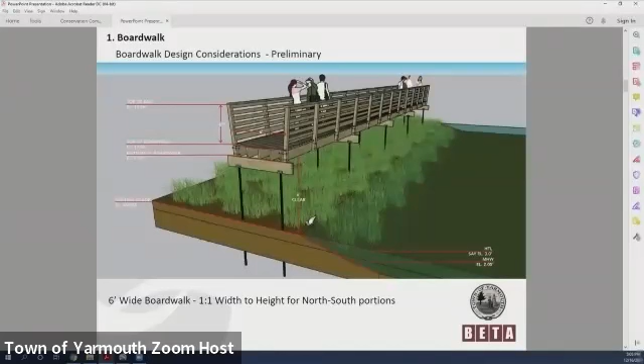You look like you have a question. Yeah, does anybody know the width of the Grays Beach boardwalk? Yes.

I went out and took a look at that, and it's 4 feet wide there inboard of the posts. And we're currently proposing to be at 6. Oh, well, for this, that makes me feel a little more comfortable.

Do you have a separation that you're proposing between the boards on the walk? In terms of the space? Yeah, ADA requires a half inch or less, American with Disabilities Act, so it's going to be in that range. At this point in time, we're thinking it's all boardwalk and not grading. I know at one point we talked about grading might be an option, and we feel like we can be successful with planks, and it's a more consistent system.

Thank you very much. So then while we're talking about that, I think, because we typically will ask applicants with dock and pier projects to go with the now standard recommendations of marine fisheries, where we have a 1.5 to 1 ratio, I would suggest that would be the better way to go. I realize it's going to be a longer, taller thing, but I think if we're asking everybody in the public to do it, we should certainly expect the same thing from any town project as well. So that would be my comment on that.

Yeah, I wonder if I could go back a slide and look at the plan view, and I'll just touch on the approach. So particularly in the north-south runs, the yellow runs, we were hoping that we could maintain the minimum of a 1-to-1 ratio there. So I understand what you're saying.

You're asking for greater height. We thought because of the solar orientation that there would be good access to the marsh grass canopy and sunlight coming through in those yellow sections.

And they were proposing to transition to a higher elevation for the red section. So there we were looking at a 1 to 1.25 ratio, essentially gaining some elevation over the marsh for the red section. And as Laura said, that's also the area that would have overlooks, so the overlooks would be a little bit wider because there'd be room for people to stand and other people to pass by. I think we do have a slide later that shows the idea of how to transition from one height to the other.

I think the other point I try to make is the terrain of the marsh does vary subtly within like a 1 foot range. So while it's all tidal, our goal would be to establish even elevations for the boardwalk, not a lot of up and down. So in some areas you would have greater height separation because the terrain would drop down and we'd be maintaining a constant height. In the process of developing the permitting work, we're going to be looking at that more closely, looking at exactly the topography underneath the alignment.

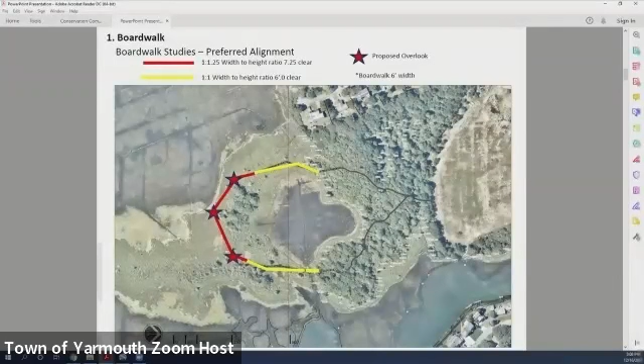But I did want to just highlight this, that we were proposing 2 different heights under this current alignment. And I will also add, as Eric was saying, the boardwalk might be greater than 1-to-1, but we're basing our height on the tallest point of where the boardwalk would be above. So at no point would it be less than that 1-to-1.

So I know you went out to Gray's Beach to confirm the width of the boardwalk as well as the spacing. Did you confirm the height of the boardwalk as well when you were there? It's a good question. I estimated it at about 4 feet. It varies because there's a little bit of a tidal inlet. The reason I paused is one of the last times I was there, it was damaged after the nor'easter, and so I couldn't get to where I wanted to go. But we wanted to look at that more closely. It's about 4 feet above the marsh.

Thank you. And what's the flood elevation here? Anybody know? BFE's 12, I believe. 13? I think it varies. So closer to the water, I think it's 13, and then it moves to 12 closer inland.

So, I mean, that's my other concern with this. The light and shading aspect is one aspect that I'm asking this about. But the other reason is because if we have flood elevation at 13 and you're only doing 6 feet above, that's going to give plenty of opportunities where that boardwalk is going to be more prone to more inundation. And if that's the case, are you going to be coming back more frequently to fix something or raise something? I'd rather just see it done once the first time instead of coming back and saying, okay, well, we're coming back to fix it again and again and again. That's just, again, my opinion.

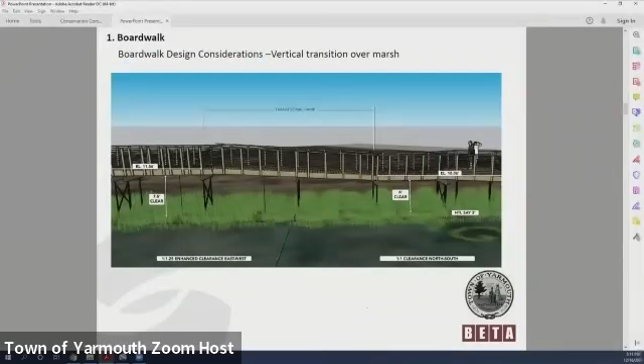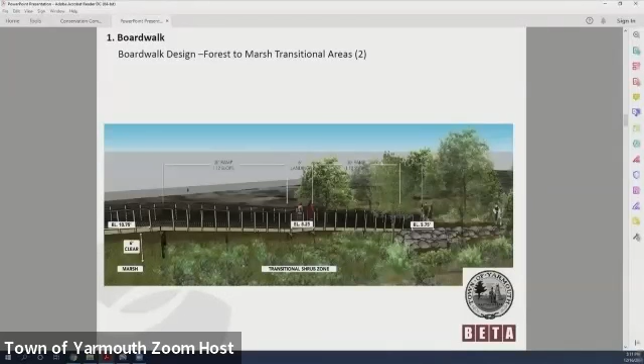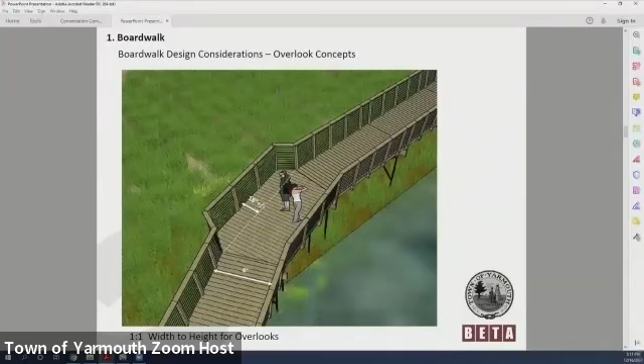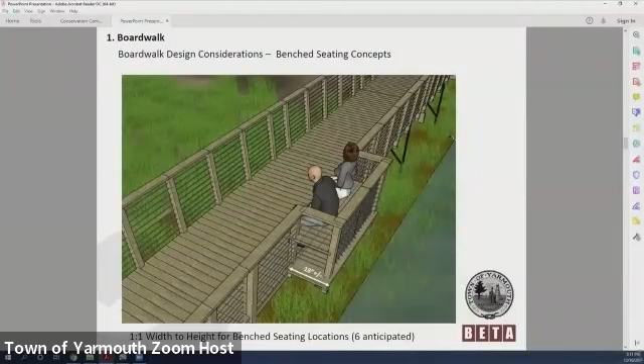There's also a consideration to add some bench seating. It hasn't been fully designed yet, but we're saying up to 6 are anticipated. We're still working through some of the design elements on the benches, which would occur along the straight shots of the boardwalk.

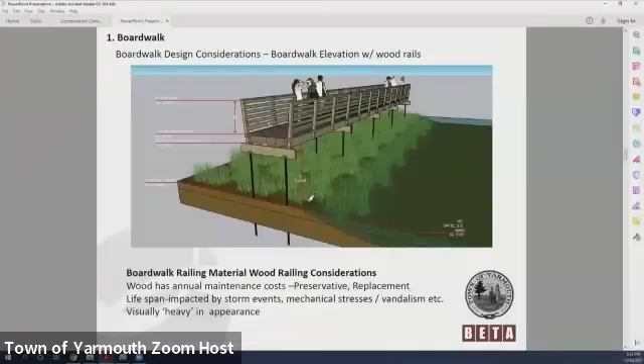So we have also looked at a couple of materials for the railings. One would be to use wooden railings, and then another would be to use a cable railing system.

In our presentation that I believe you've read, we went through it—we're looking for a little bit of flexibility here. We don't exactly know what's going to be available when this goes into construction and what construction costs are going to be. So leaving some flexibility in exactly what type of material we'd be using is what we're looking for. But we've analyzed the pros and cons of each.

We had a committee meeting last week, and the committee's interested in maintaining as much flexibility as possible. Some of the systems will cast less shadow, like the cable system or a mesh system. But the plank sort of style, like Gray's Beach, is something they're more familiar with, and it's possibly easier to maintain. Going forward, it may be a combination of different railing types, and we'll get to the solution we need to use here. But this is a slide that just says because of lots of reasons, we need to stay flexible on the design process for the rail.

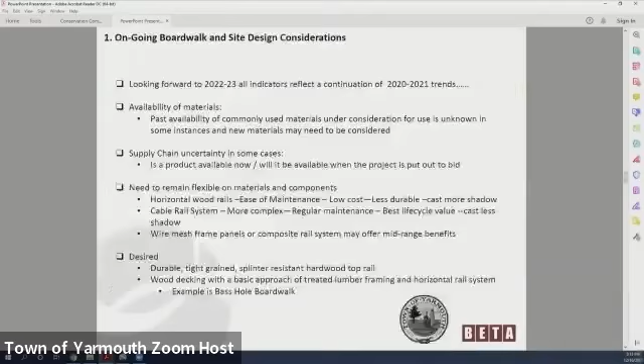That's our last slide on the boardwalk discussion. I don't know if anyone else has any input on the boardwalk height to width ratio. We are proposing extensive mitigation—we will be including mitigation in the Riverwalk Park for the impacts to this associated with the project. So just wondering if anyone else wants to weigh in.

Yes, I have a question. Why 6 feet? If Gray's Beach is 4, why are you going with 6 feet wide on this one? Is that ADA? Is that a need to be ADA compliant, or is it just 6 feet for some other reason?

Yeah, sure, that's a good question. A couple things factored into the discussion. It's been in the plans from the committee for 3 or 4 years now that that width was the goal. Part of the goal is ADA really only requires 3 feet for passage, but it does require areas to turn wheelchairs around on a regular basis. Creating those adds a little bit of complication to keep repeating these turning areas, so in some ways it's easier to just pick a width and maintain a constant width.

6 feet allows a little more free passage in both directions. I think the pandemic also showed a little space is good. There are some challenges at Gray's with people actually having to touch each other when you pass. And this boardwalk is long—about 1,600 feet in its total loop. So there's not really a clear one-way option, maybe it could be a one-way system, but it's hard to enforce that, so it's probable you're going to encounter people in both directions.

So there are concerns about longevity, and in concurrence with this system, we're also looking at a conventional wood piling system, which you're more familiar with, like Bass Hole. That's what you have. I think with this particular system, it's lighter weight equipment, less of a footprint in the marsh, so sort of less of a permanent impact. But that's got to be balanced with durability, as you say, and long-term ability for the structure to stay there.

We've had a number of installations over the last 2 years utilizing composite pilings, and certainly a lot of benefits there potentially for this project - lighter, easier installation. Just didn't know if it was part of your analysis or not. That would be something I'd like to maybe talk with you more about, composites.

We've looked at a hybrid that is a screwed-in helical anchor and then a wood post, but I don't know that we've gone to the next level in terms of a Pearson composite. Pilings from Rhode Island has been utilized a number of times on Bass River. And relative to the grating, at this point, we're trying to stay with just a standard system, which is the plank system. Were those private docks or public docks you're speaking of? Private.

Yeah, so one of the challenges here is the ADA compliance requires a very small opening in the decking. And the amount of light that would get through that can be challenging, especially when the grate is so thick that not much light can get through. At least that's what we're finding at this point in our investigation. So we're still looking at the plank system, but I'd love to talk to you about those.

Anybody else? Yeah, thank you. I like your planning, I like what it looks like. I know you'll make some adjustments as have possibly been suggested, but I appreciate your effort and the effort of the committee. I think it looks great. Thank you.

So here we're going to talk about Riverfront, degraded versus non-degraded, and how we're going to apply the definitions and the regulations. This is an aerial photograph taken from 2021. It shows the locations of the revegetation along the banks of the river, and it also depicts the larger drive-in area, as you can see where that was located.

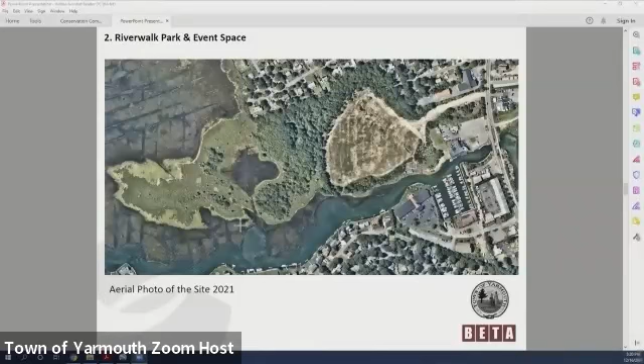Sorry, I might have just messed you up. Not working anymore. Yeah, give it a try. All right, let's see. There we go.

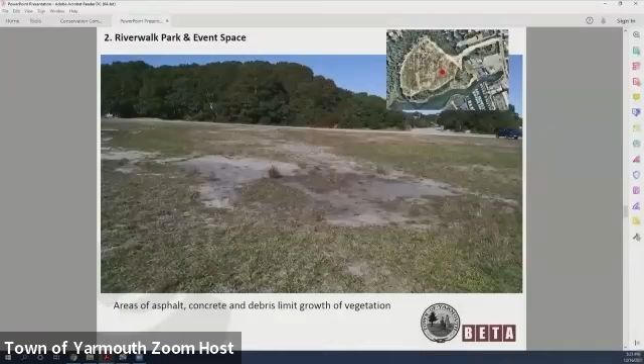I'm going to go through our analysis of the site. This is a picture of what the interior of the site looks like. The former drive-in area shows limited vegetation. The soil is extremely compact, with debris, concrete and asphalt scattered throughout, with small amounts of sand on top and some herbaceous vegetation growing in that sand.

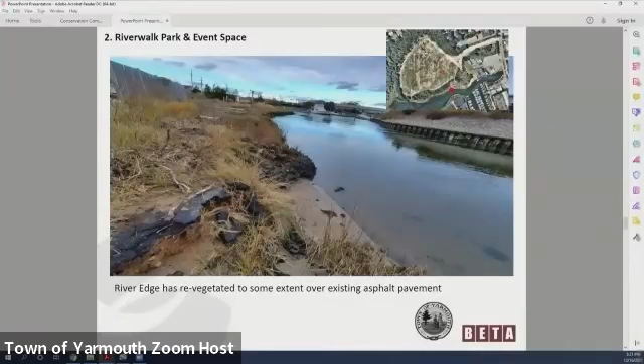This is a picture of the bank of the river, which shows asphalt that extends up to the river. Given the extensive salt marsh vegetation on top, we're not considering this area degraded, but the area associated with the upweller, we are, and we'll talk about that in a minute.

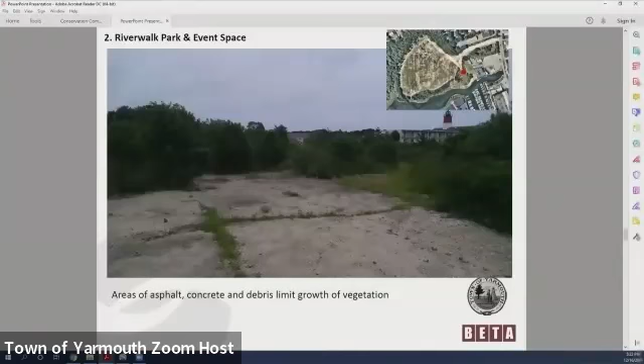This is an area shown with the red dot in the upper right corner indicating where this is. There are areas of asphalt and concrete again along the project within the riverfront area.

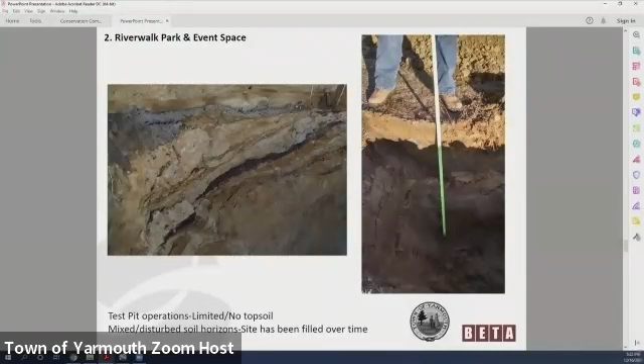Finally, this is a typical soil profile from our test pits, looking at what we can do for drainage and other considerations. We found lots of mixing of soil types, and little to no topsoil present on the site.

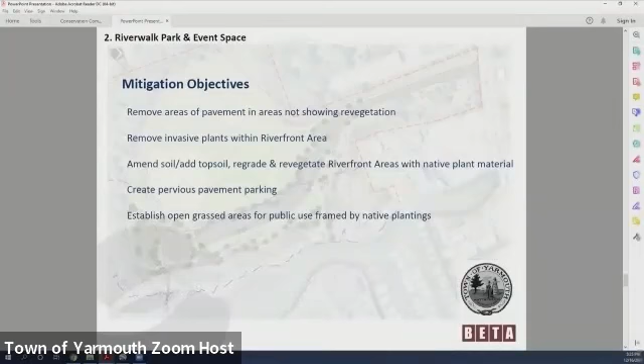If I may, I have one question for you. This kayak launch area - are you proposing that they walk the kayaks all the way down that ramp, or will there be storage on the resource area for these? Because that looks like an awfully long ramp to be carrying a kayak down, or a plank, and then down the ramp and then off a float.

I don't know how that would be feasible unless you're keeping the kayaks in the resource area. If it's going to be done, I've done it - it can be done, it's just not very easily doable.

I think it's fair to say we're still looking at how that works. Ideally we're using the same system as the boardwalk, so it's going to look the same - the wider, 6 foot width. So there's a little bit more accommodation going out on the pier itself, but there are those challenges you talk about because of the distance.

Ideally there's some type of rack system up where the cul-de-sac is, right around the 100 foot line. There'd probably be support racks, maybe a small kiosk at the cul-de-sac drop-off area, and that would be where storage would work best. Then they'd have to take the kayak 100 feet out on the board.

Yeah, and the challenges of the ramp itself - I've ridden a kayak down a ramp, it's not real fun.

So it is a piece we're still continuing to look at. It's been in the plan since 2017, so it's one of those things we're now getting back into, and we need the bathymetry to really finalize the position. That will affect the gangway and some of those things, and hopefully decrease the navigational component too, because it's very narrow in that area - that needs to be assessed as well once we get it dropped in.

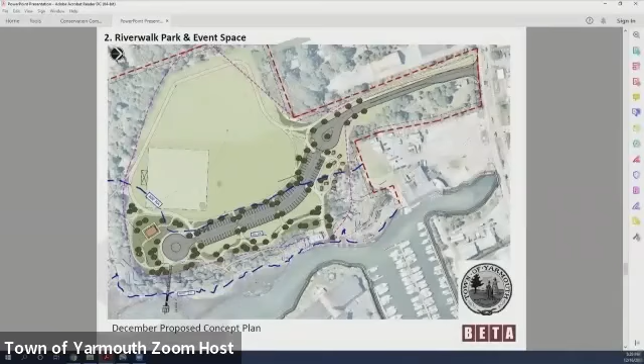Yeah, that'd be great. Along those lines, how many parking spaces do you have in your plans there? There's I think between 90 and 100. We've played around with the configuration a little bit, and those are permanent spaces along that entrance drive coming in.

And you can see there's a group we're calling artist shanties up there in the northeast corner. So there's probably that first group of parking associated with that use, maybe some of that second - the middle is probably associated with more passive recreation. Then the last group to the south is probably associated with the water access, the kayak and canoe and maybe paddleboard, and certainly people headed out to the boardwalk.

Part of the goal here is also to have sort of a perimeter walking system for the field in the inland areas, so that you can make a loop and then go out to the boardwalks and come back into the park itself.

Looks good, thank you. Great. Maybe I missed it - what's the majority of the rest of the field going to be?

It's flexible, it's going to be grassed. We've been working a little bit with fire and safety in terms of their access requirements. There's kind of a lightly shaded section to the west, and the thought is that would be where the parking would be on site, like overflow parking for an event - really in that upland area that's lighter shaded beyond the event space.

On to bathrooms. All right, on to bathrooms. Sorry, Mr. Chairman, can I just make a comment?

One of the things that came up during the design meetings was trying to have a pathway that gave people a view of the water as part of the Riverwalk Park. With the vegetation being relatively high, they wanted to get as close as possible to the river while still respecting the 35-foot setback and the requirements of the riverfront area regulations. So I wanted to bring attention to the idea of putting a pathway closer to the water, and get feedback on the 35-foot setback, the width, and the materials.

I assume it's going to be some sort of hard pack construction. Is that what you're thinking about? We're having some challenges with the water table out there being higher than anticipated, so a hard pack, like a stabilized earth path, might be the solution rather than trying to do a pervious path.

Laura pointed out concerns with sediment, especially in that environment, which might deplete the functionality of a pervious system, so I don't think that's going to work. So as you suggest, a stabilized earth, crusher dust, or something like that might be the treatment.

Okay, anything else? Kelly? Anyone? All right, so restrooms.

The restroom is shown near the cul-de-sac, at the intersection of the three aspects of the park, so it's near the parking and the kayak launch, near the event space, and also near the entrance to the path to the woods out to the boardwalk. It's centrally located, and that's why we're proposing it in this location.

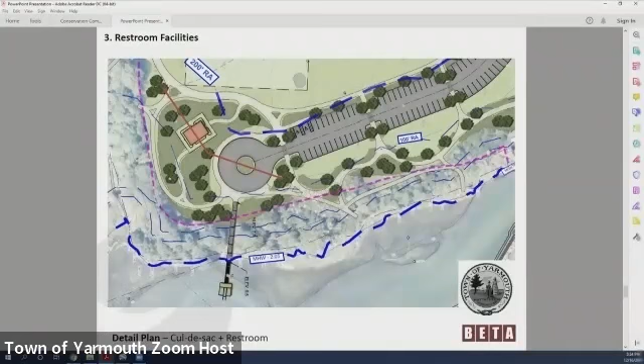It's shown within the outer riverfront area, between the 100 and 200 foot lines. One consideration is that the restroom is within the floodplain, and currently there's no sewer to the site, and because of the high groundwater, septic is also not available. So we're looking at using a temporary tight tank until the sewer is installed. We can answer any questions on that.

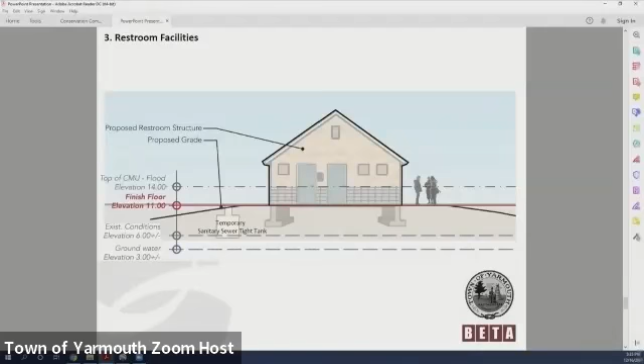There's also grading on the outer area of the restroom to protect it in the floodplain so it won't get flooded during larger rain events. You can see here what we're proposing, the dashed line on the bottom is roughly the existing grade. One reason the restroom is positioned here is it's one of the higher parts of the site, allowing us to elevate it by placing some fill there and getting it a little more out of the floodplain.

As Laura said, it's probably going to be a concrete masonry unit building, where the lower level can be flood proofed with stop logs and weirs to protect it from getting inundated. So that's the concept we're pursuing now. And as this shows, the tight tank would be next to it. In the future, that tank would receive a pump station and would be able to pump out to the sewer service when it comes in on 28.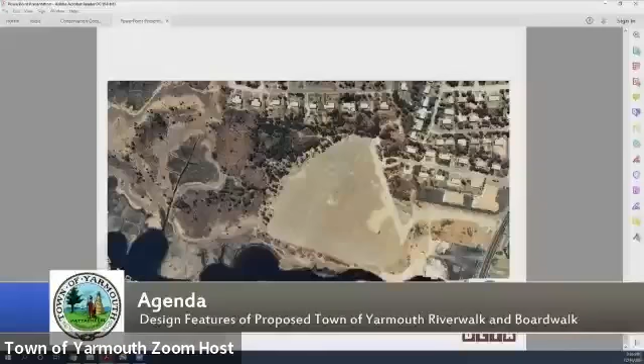All right, next order of business, a request for determination of applicability for John and Catherine McNamara, 7 Kelp Lane, Yarmouth, proposed expansion of an existing 5-foot by 20-foot float within land under the ocean and land containing shellfish.

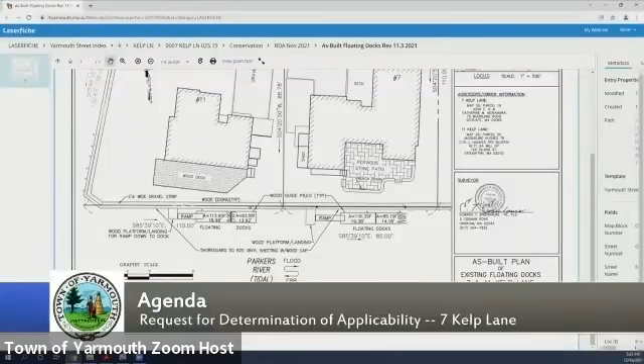Okay, so it's increasing by 100 square foot, right? Basically, yes, just within, just a smidge outside the 200 square foot limit.

Questions from the commission? Start with Ellie. Is this existing now or is it proposed? The floats are existing, yes. It's what was there when I bought the house 7 or 8 years ago.

Okay, does your Chapter 91 license allow those 2 floats? It does not, no. It allows a 5 by 20 float. What's the depth of the water there, do you know? About 4 feet.

I know our regulation is 200 square feet, but that is a very narrow area and it does create a lot of shading. That's really my only concern, that it's very narrow in those little fingers that they have there, so.

Just my thought, that's all I have, thank you. Okay. I was just wondering, you're trying to accommodate your boat on these. We tie the boat up there, correct, and how long's your boat? I have one that's 30 feet, one is 18 feet, so they protrude beyond, actually, 2 boats, okay. I kind of agree with the fact that those floats continue the whole length of that area.

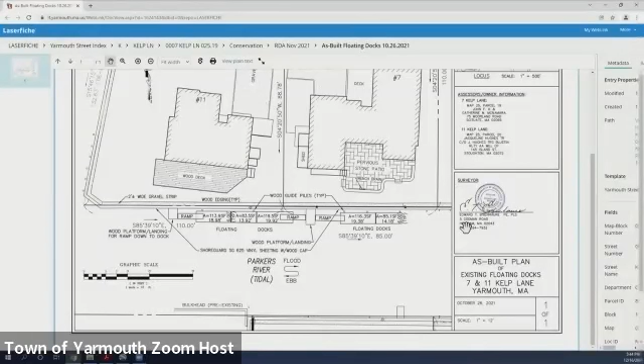So the property to the left, I think it's 11 Kelp Lane, right? Correct, they were permitted for two floats at the 200 square foot, approved by the commission. I'm not sure why, maybe because they're on the Parkers River side so there's more space there. I looked at all the permit sizes for other properties in that stretch, and they were all 6 by 25, 6 by 22, 6 by 24 - one float. And that's all I have.

Okay, I would tend to agree that if it was permitted for 100, it's awfully congested in there, so I would be inclined to keep it at the 100, but Ed, that's just me.

Just another thought - if you look at the other floats in the area, there's one 6 by 25 and the dimensions Kelly mentioned: 150 square feet, 132 square feet, 144 square feet. And then we're asked to make a judgment call on 230 square feet additional - that's disproportionate. I agree.

Okay, anybody else in the commission? Anybody in the audience have any comments or questions on this project?

Can I make one suggestion? Yes, you may. Given that some of the other properties have up to 6 by 25, I don't know whether an in-between size consistent with the other properties would be an appropriate suggestion or alternative. It is. This is an RDA though.

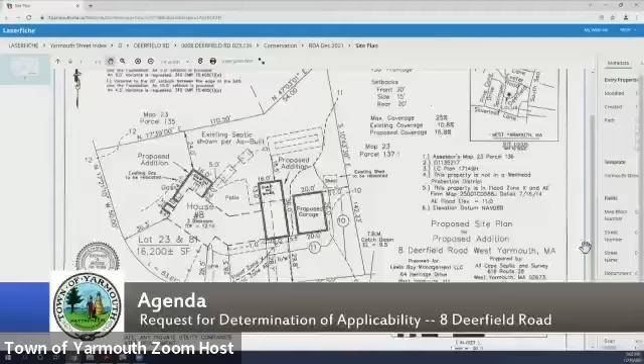There's no wetlands or anything like that. I don't know if you guys went out there, it's a fairly flat lot. From the street to where the structure's going to be, it's probably about a 6-inch grade. We're going to put 2 dry wells in to catch any water runoff from the garage. Okay, very good. That's about it. And we're removing the existing asphalt driveway where the existing garage is, and we're going to remove that and plant grass, and it'll be a stone driveway proposed with cobblestone. Okay, very good, thank you.

Questions from the commission? Rick - all set, thank you. Tom - all set, thanks. Paul - no questions right now, all set. Ellie - good. Kelly - I have nothing. Does anybody in the audience have any questions, concerns, or comments with this proposal?

If not, may I have a motion for a negative-2? So moved. Is there a second? Second, Tom. Thanks, Tom. All those in favor? Aye. Aye. Opposed? Carried unanimously.

Great, thank you. There you go. I bet you were worried, weren't you? He should have been. Hey, that was painful, right?

All right, next order of business is a continued notice of intent, continued from November 4th, 2021, for SE 83-2306, Jeffrey and Beth Fanara, trustees for 116 Mayflower Terrace, Yarmouth, proposed elevated walkway with fixed landing within land containing shellfish, land under salt ponds, land containing salt marshes, and land subject to coastal storm flowage.

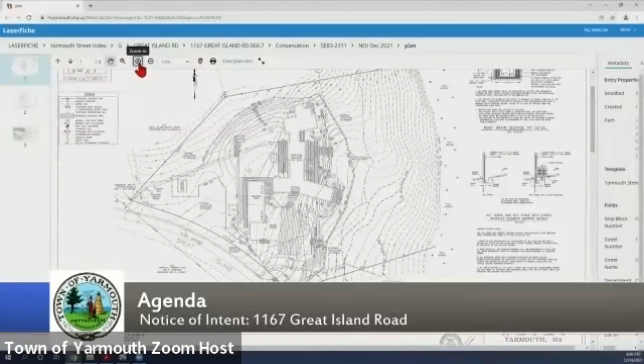So just to refresh everyone's memory, the resource areas here are a salt marsh, then we have land subject to coastal storm flowage moving inland, and we also have the top of a coastal bank associated with the salt marsh. The 100-foot buffer zone to the top of coastal bank extends into the upland on the property.

The project has been designed so that it's completely outside of the 100-foot buffer zone to the salt marsh, and completely outside of land subject to coastal storm flowage. The project is within the 100-foot buffer zone to the top of the coastal bank, which is why we're here tonight. This is a large house on a large property, so there's a lot going on in the upland.

Just a couple notes about the upland: most of the structure and the accessory buildings fall in the upland. The septic system is entirely in the upland outside of the 100-foot buffer. And most of the driveway and parking areas have been designed outside of the 100-foot buffer to the top of coastal bank.

So moving towards the resource areas, I'm going to start with what is inside the buffer zone. First, we have 345 square feet of the structure located inside the buffer zone. The closest the proposed structure is to the top of coastal bank is a distance of 78 feet.

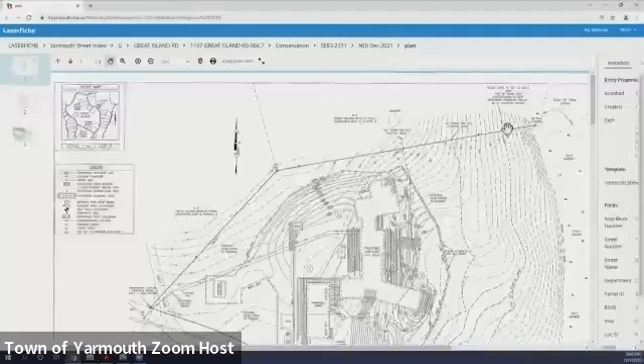We have provided a limit of work and erosion control barrier shown on the plan. This is a hay bale silt fence erosion control barrier. At the closest point to the top of the coastal bank, there's a 55-foot separation between the limit of work and the top of the coastal bank. You can see where it comes to a point where that part of the structure is in the buffer zone, and then the erosion control angles towards the property lines, and the undisturbed buffer gets wider as you move towards the property lines.

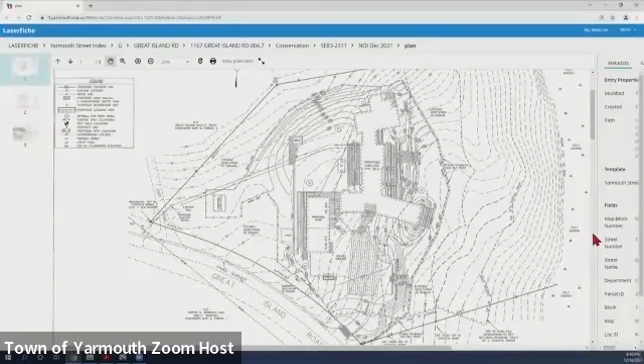So of the 6,500 square feet of disturbance in the buffer zone that I mentioned, upon construction and final grading, 3,800 square feet of that temporary disturbed area will be replanted with native species. It is the plan of the property owners to come back to the commission in a few months. They'd like to develop a plan with Wilkinson Ecological Design Company to develop a robust, diverse buffer zone between where the yard area ends surrounding the house and as it heads in towards the wetlands. So I think that's it, and we're happy to answer any questions the commission might have.

Okay, thank you. If you don't mind, I'll start off with a couple of minor things. On your regular engineering plan by Schofield Brothers, this isn't a big deal, but I would like to see a distance from the closest point of the house construction to the coastal bank. From the limit of work or from the structure? From the structure. Okay, we can add that.

In terms of the trees you're talking about cutting down, I would ask that you don't cut any. The only trees you should be cutting down at this point would be for construction purposes. You're going to be coming back in a relatively short period of time, probably before the project even gets rolling, to develop your view corridors and landscape buffer landscaping. So I'd rather see something that handles those trees, the trees getting cut as part of the view corridor, under that new notice of intent.

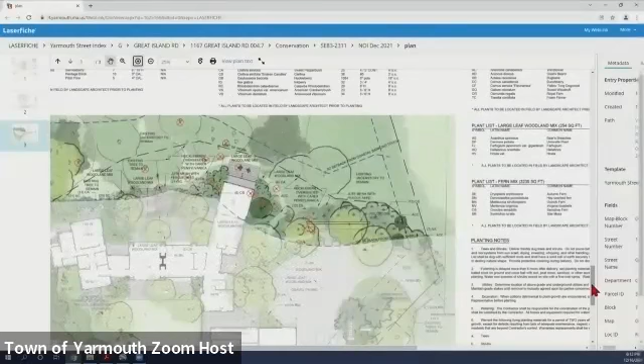The majority of the trees are within the limit of work. Is this the one that works? It looks like that's just 4 trees, inside the 50 or just outside the 50. Yeah, outside the 50. Okay. There are the 5 trees that are outside of the 50-foot buffer and between the limit of work.

We've proposed to remove one pine that has a rotted base, one pine that doesn't have a canopy, and 3 oaks that were being removed to allow more light into the understory and let the adjacent trees mature. With that said, we'll be bringing a project forward with Wilkinson and can address those within that particular package. Yeah, I think you should. The trees that are diseased, I understand that, but again, I would put all of those into your new filing and not include them as part of this file.

Okay, I'm good on that one. Got that one. Let me read my notes. There seemed to be a fair amount on the site, some notes about relatively unvegetated or undervegetated areas. We'd appreciate that you leave those to naturalize within the 100-foot, again depending on what's going on with your new filing. But under this, I would say don't do anything in the understory other than the planting you've proposed for this. Does that make sense? Yeah.

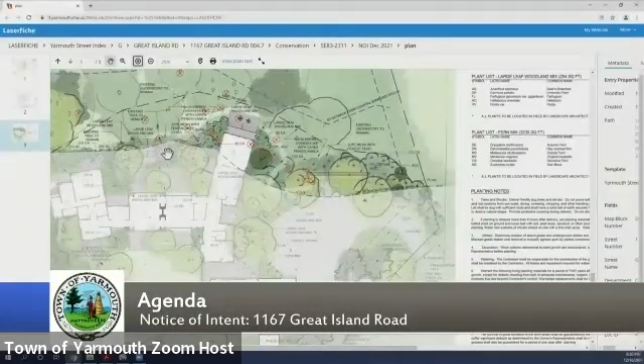These steps - that's within the 100-foot. Yes, there are some steps coming down from a terrace that go into that lower bowl area. What are they made of? Granite or stone. So then, non-pervious. All right, that's interesting.

Another curiosity about your plan - I was going to compliment you on it, but then I tried to understand the scale, and in all my years on the commission, I have not seen a 1/16 to 1 foot scale. It's not consistent with any engineering scaling, so it's very hard to understand some of the distances. Just a point of information for future plans - it makes it very difficult.

Okay, that's what I have. Thank you. Okay, all right.

Kelly, the only additional thing I have is that we did receive the DEP file number for the project, which is SE 83-2311.

Anybody in the audience have any comments, questions, or concerns with this project? Jenny? Oh, I'm sorry, I didn't even ask about that. Any further discussion on the commission?

Okay, if not, would somebody like to make a motion to approve the project with special conditions for SE 83-2311? So move, Paul. Is there a second? Second, thank you Rick. All those in favor? Aye. Opposed? Carries unanimously.

Going back to the plan, this area up here has no 35-foot line shown. I'm assuming most of this is within the 35-foot buffer, and I would recommend revegetating that area to reestablish the undisturbed 35-foot buffer, since this redevelopment of the lots is an opportunity to restore that buffer vegetation. I'd suggest including a condition that a landscape plan be provided to revegetate that area.

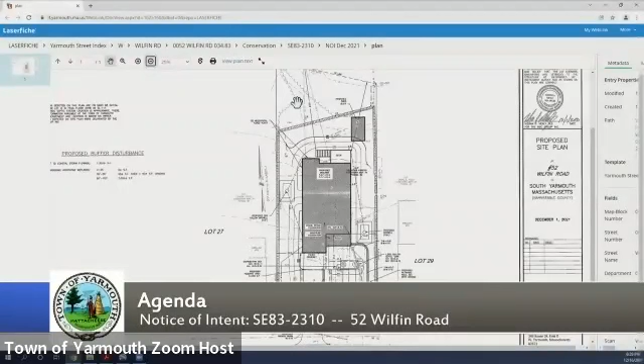Does anybody in the audience have any comments or questions on this project? Unless there's any further discussion among the board?

I'd like to make a motion to approve the project for SE 83-2310 with the receipt of a revised plan and a landscaping plan showing the revegetation of the 35-foot buffer, and a note about the tree in the 35-foot buffer as well. Would anyone like to make a motion to that effect? So moved. Is there a second? Second. All those in favor? Aye. Opposed? Carried unanimously.

All right, next order of business, another amended order of conditions for SE 83-2253, Amy McIsaac, 24 Charles Street, Yarmouth, proposed removal and containment of soil beneath the house and within the existing foundation, and construction of a new foundation wall to support the existing garage within the buffer zone to a coastal bank.

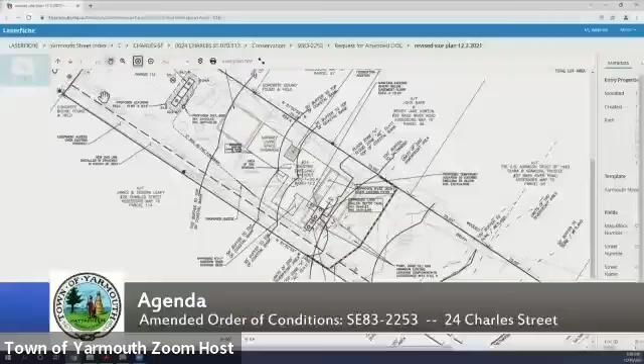I think the plan outlines the areas where nothing has changed with regard to putting it back in. There is one minor change here that I really need to bring to your attention. In this area, we want to expand a little bit because they have an old type of stairway system there, and in order to get a code-compliant stairway, we need that small addition between the breezeway — between the main house and the garage. I think that's about 98 or 99 square feet.

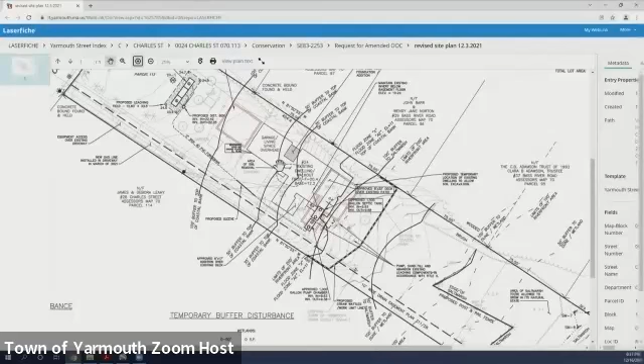Okay, all right, well, thank you. Thank the commissioners. Any questions among the commission?

Ellie? No, I don't. Pat? Not. Thank you. Paul? No, I think. What an undertaking. No, thank you.

Okay, Kelly? I just have one question, and I think I asked this the last time you were here, so I apologize — I can't remember the answer. The dewatering to the frac tank, is that water taken off site, or is it being discharged on site?

Yes, excuse me. We have the approvals now, or we did from very early on, for 200 yards of material, of which we moved about 10 yards. So the 115 yards more fits within that originally approved 200. We had 2,500 gallons of water that we were going to manage, and that would go off-site for remedial waste treatment, of course.

I think it goes to Olson's greenhouses, and they distill the oil out and use it for heating greenhouses, then reuse the water as chiller water in high rises. So it's a recycling process rather than disposal.

It will be held temporarily in a frac tank to accumulate it. So to dewater, we want to pump it into the frac tank, and then we'll have a vac truck come in, suck it out, and take it off site. That'll all be copied in the public record reports, which the town administrator, the health department, and yourselves would be privy to. It's all public record documentation, and we're certainly happy to have anybody by while we're working, but this will be a very active construction site for about a 4-week period.